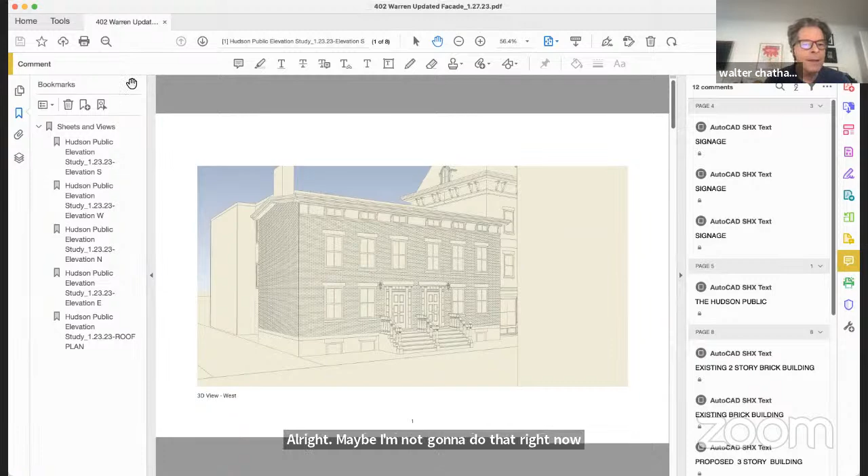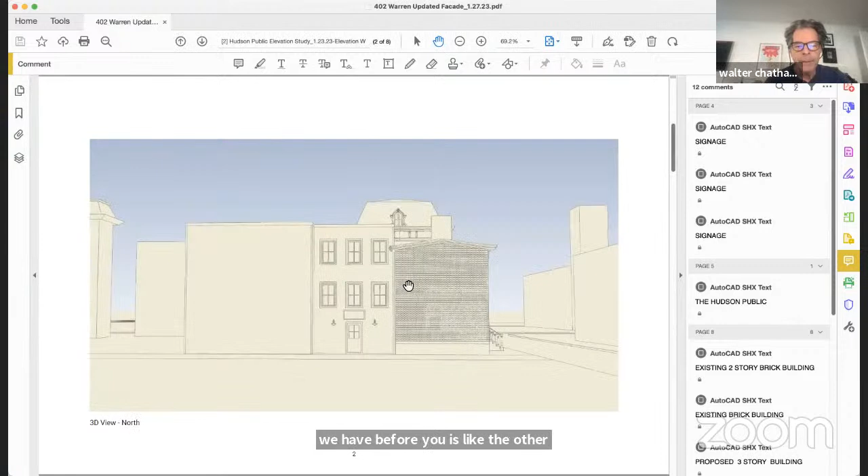So I think the thrust of the conversation last time seemed like everybody was pretty okay with everything, at least on the commission, except for the row house. So we had some serious discussions internally and decided, you know what, for 2 hotel rooms, it's just not worth the bother. So the new proposal we have before you is like the other proposal, but it has eliminated the additional rooms we were proposing on top of this structure here.

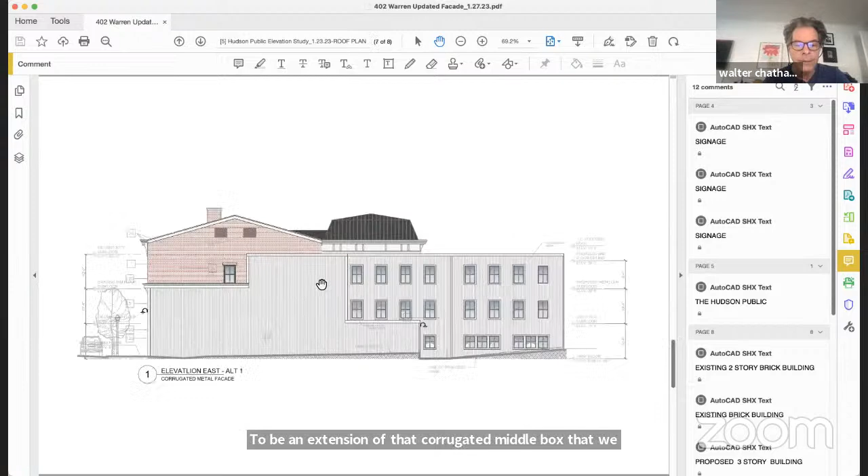We've simplified the proposed structure that we would have there to be an extension of that corrugated metal box we were proposing behind Warren Street. So we basically run this along the property line, the east property line. And as I say, we're going to try and do the project without changing the roof line of the small row house. Now, this illustration doesn't show what we probably have - a roof cricket back there somewhere and some gutters. Chip can explain all that better than I could, but basically the idea is, okay, nobody liked it, or there were a lot of issues, so we're taking it away.

What do you think now? And with that, I guess we can open it up to a general discussion. I think that's great, but the purpose of the public hearing is to connect the public to the entire project - maybe you want to do that very, very quickly, Walter. Oh, I'm so sorry, I guess it's a public hearing, it's not just for us. No, I understand, I guess it was a continuation, so I was assuming incorrectly.

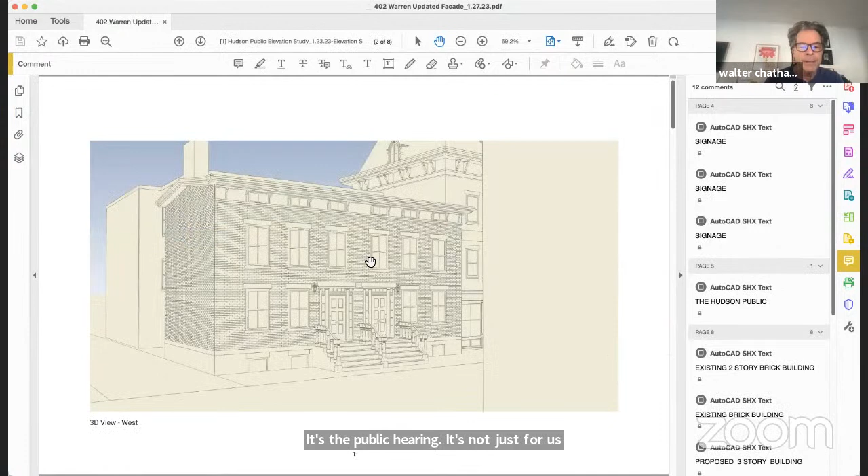So this proposal - let's go back to the elevations - is to take the existing buildings that stretch down 4th Street, starting at Warren, down to Prison Alley, and to take this vacant lot here, at the moment vacant, and build a hotel on the combined properties. We would keep the historic buildings pretty much as they are and infill a building here, which would be the entrance to the hotel and therefore would have a high roof because we have elevators in there that need an overrun. So for this, we're proposing a mansard and a setback building here.

And then at this point, we're proposing restoring this little row house building here and also this 3-story building here, which was at one time a hotel and possibly also offices. As I say, the brick bits are the historic buildings. This is our infill proposal, as is this thing you're seeing behind the building, down the alley about 20 feet. So it would not be visible in any way, shape, or form from the street, except if you looked up the alley and happened to see the side of the building.

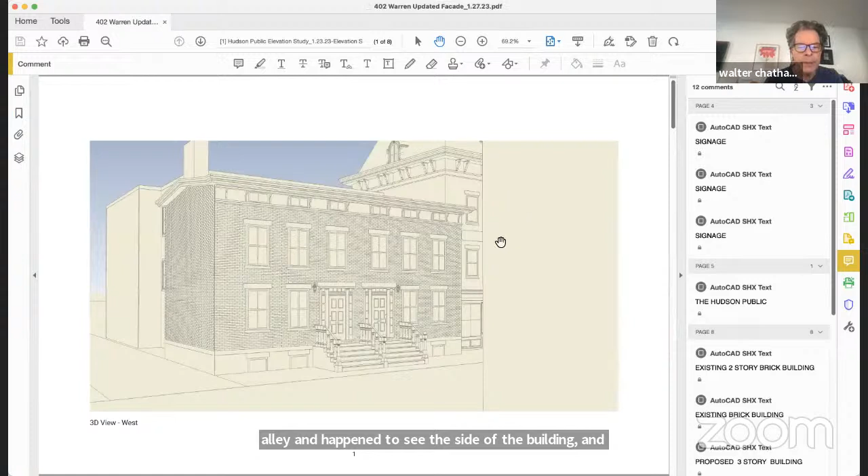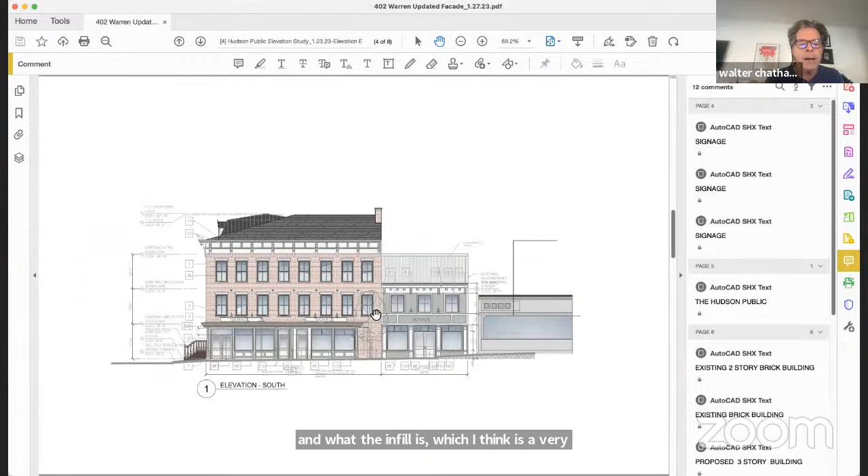And we produced a series of perspectives just to kind of show the effect. This is the new building we're proposing here that I mentioned with the elevators. This is the corrugated metal clad part back here, frankly utilitarian, and I think would very clearly set off what the historic material is and what the infill is, which I think is a very important point. We're not - this is clearly infill in my mind. We're treating it historically just because it's part of the historic street front. So I hope that has brought us current and everybody now understands where we're at in the discussion.

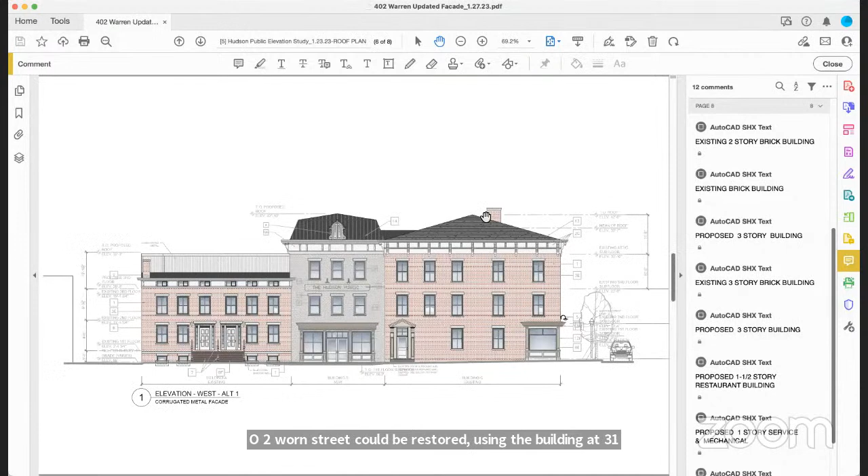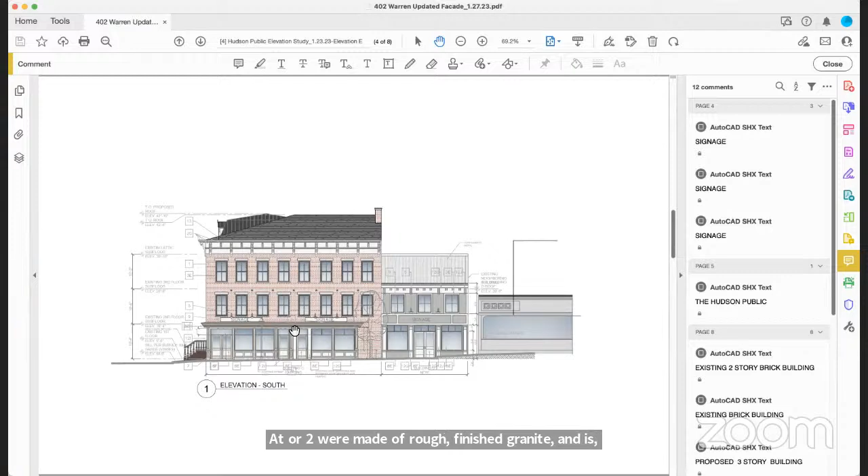The pillars and the remaining fragments around the existing doorway at 402 were made of rough finished granite, dressed with a stone finish to match marble. The square molding at the top of the lintel may be marble.

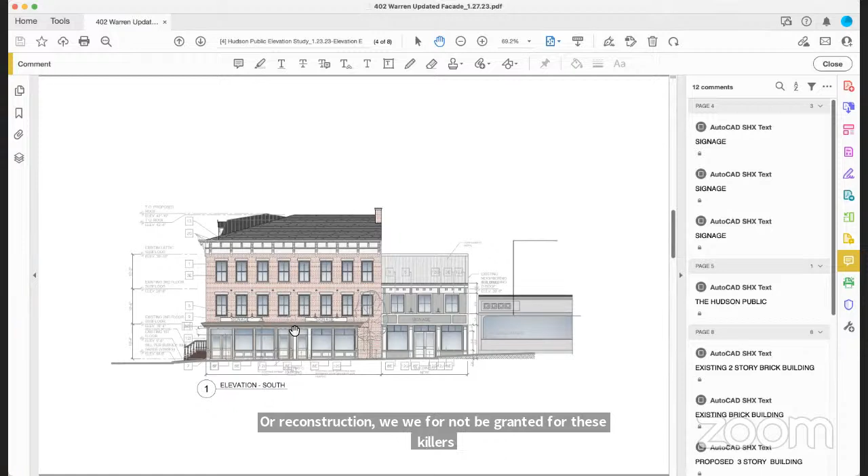For reconstruction, the core need not be granite for these pillars. They could be cased I-beams given a marble finish and would do just as well as putting back the actual granite, which is then covered with the finish of marble, probably using marble dust and some kind of sand and originally linseed oil.

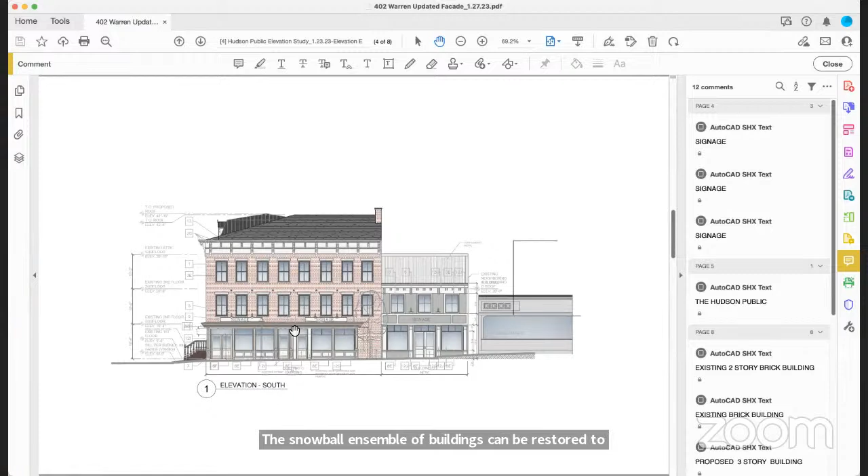The I-beams that are now forming the lintels of the building could remain in place and given a marble finish as well, and this noble ensemble of buildings could be restored to their former glory. I just think that this is a valuable asset and it can be made to really reflect the scale and the look of life here at the time they were built.

I think the city of Hudson is remarkable in that respect because there's so much of it that is still the scale and finish and look of another time. And I think we need our history. I think we have a prime example of this in our political situation. Our Constitution is being ignored. Our past is being ignored. And I think we should hold on to it. I think it helps us to understand our lives and go forward. Thank you.

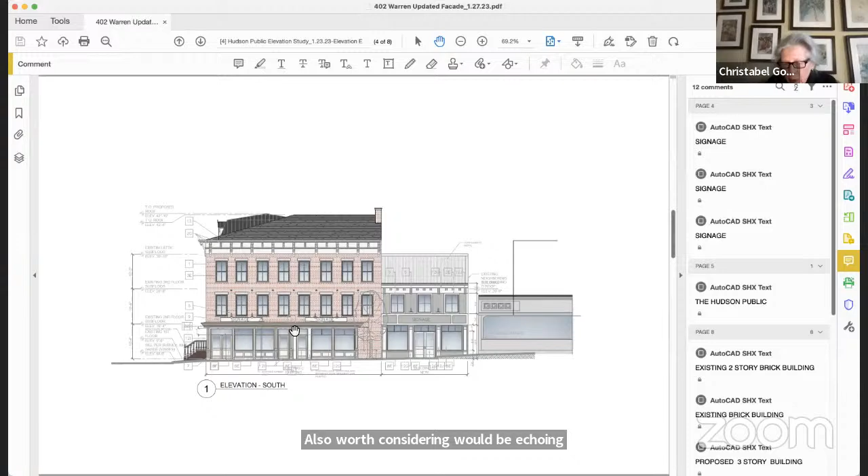Also worth considering would be echoing the 4-bay fenestration on the building that was lost, with additional windows above the hotel entrance, which might help mitigate the new height. Certainly, I hope that the new hotel can become an asset to Hudson that fits in with the real historic architecture that we are fortunate to have here, while maintaining its own distinctive presence. Thank you.

Yes, but also Chip wanted to see a plan. If it's okay, I'm going to put up an elevation right now and tell you what's happening behind it. Is that up and can you see my screen?

This is the actual alley elevation. That's the blank end of the current row house under discussion. Then there's an inset, which is a secondary entrance and egress for the hotel. Then there's another blank wall because there are hotel rooms behind that. Then here, you go down a little walkway and that's a little tail that takes you into the service area.

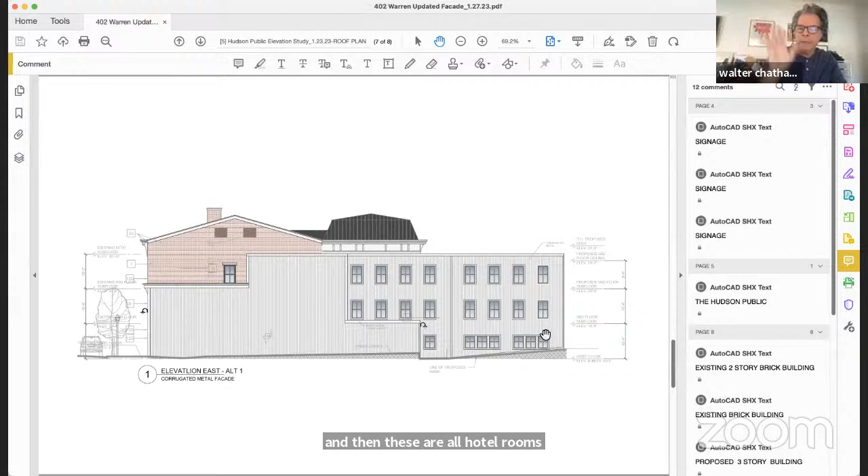And then from the side, there's the tail again, the service tail. So there's a little gap between this building and the adjacent property. And then these are all hotel rooms facing onto, not directly onto the alley, but looking east, perpendicular to the alley. And then I'll just show you, there's the alley, there's that elevation I just showed you. So that's the little one-story tail.

So Chip, to answer your question, on the ground floor this is all the kitchen and service. And down here, these are all hotel rooms. The little finger sticking out there, is that just a one-story finger? It's a one-story finger that contains our trash room, right there. So the trash room access is through those double doors out to the alley, yes.

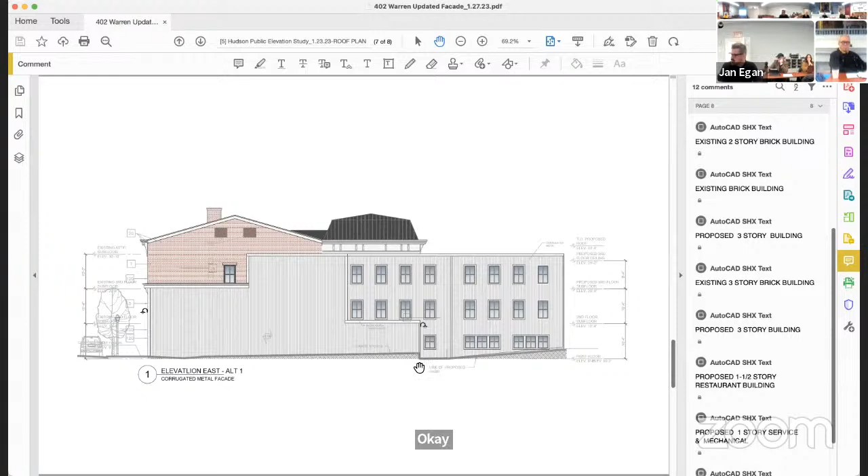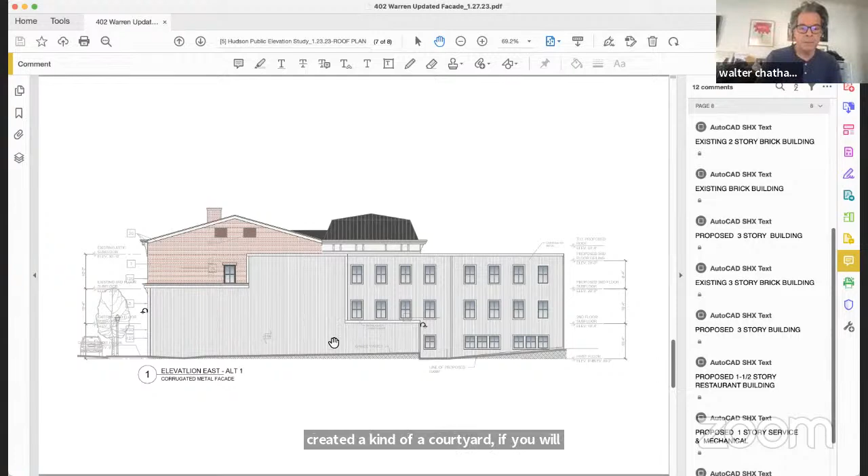And that's one story high. Are there windows—you've created a kind of a courtyard, if you will? Yes, yes. Three-dimensionally, it's hard to read because we only have the elevations and this site plan roof—it's really just a roof plan.

So the two and three stories parallel to Warren Street, that's above the trash bin or the trash room. That trash room is roofed. It's a room, yes—it has a roof, yes.

So are there hotel rooms parallel to Warren Street that overlook that? There are hotel rooms here that look back over it. So those two windows—correct, those are hotel rooms? Correct. Okay, keep this elevation up, please.

Then the infill building to the left of the historic townhouses has two floors—are those hotel rooms? Sorry, do you mean are we on Warren Street now? No, on the alley. There's three stories here, all three stories that we're adding. I'm sorry, the second and third floor, those two stories—are those hotel rooms? No, those are corridor and the stair. Interior circulation. Okay, so there are no hotel rooms there.

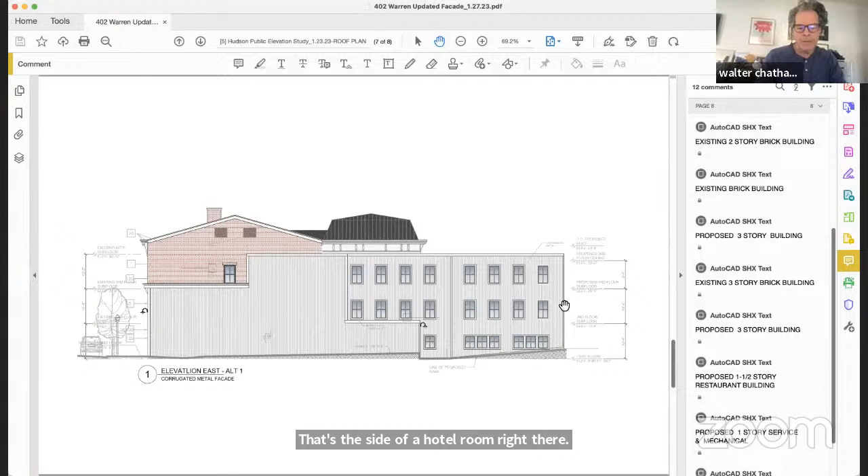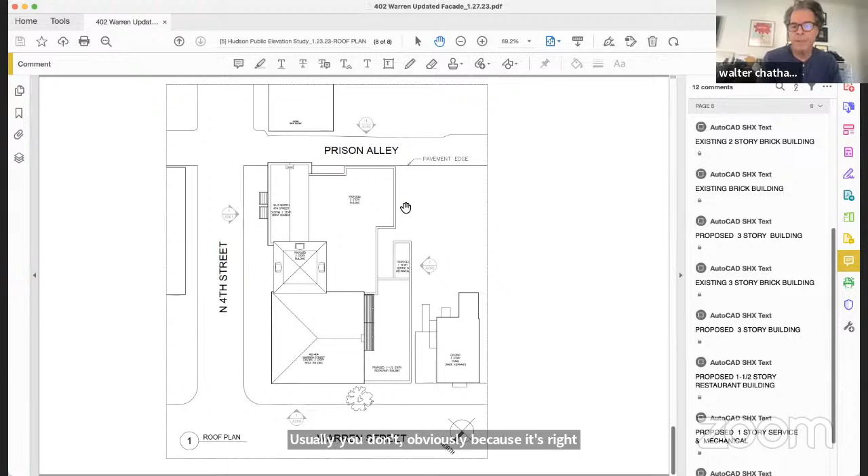Would that hotel room on the corner of the alley and the interior east wall benefit from having windows looking at the alley? Well, let me turn that around—would that benefit our discussion with HPC if we had windows on the alley? Because I have no objection. Usually you don't, obviously, because it's right there, and if the guy comes with the trash truck at 4 a.m., but I guess we'll hear him out the front window anyway, so sure. I mean, we could dress it up.

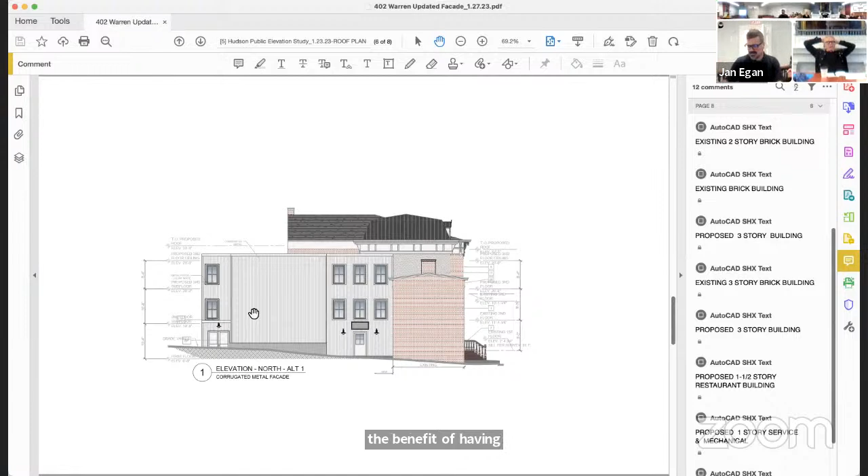It's interesting, apropos the discussion we just had—so that could be dressed up, and this can be dressed down. I think that's what I'm saying, so we can kind of do a blended average over the whole thing. The benefit—also issues of privacy—the benefit of having additional windows on the alley is to show, in an urban setting, that there's a kind of supervision overlook activity there that promotes a healthy alley.

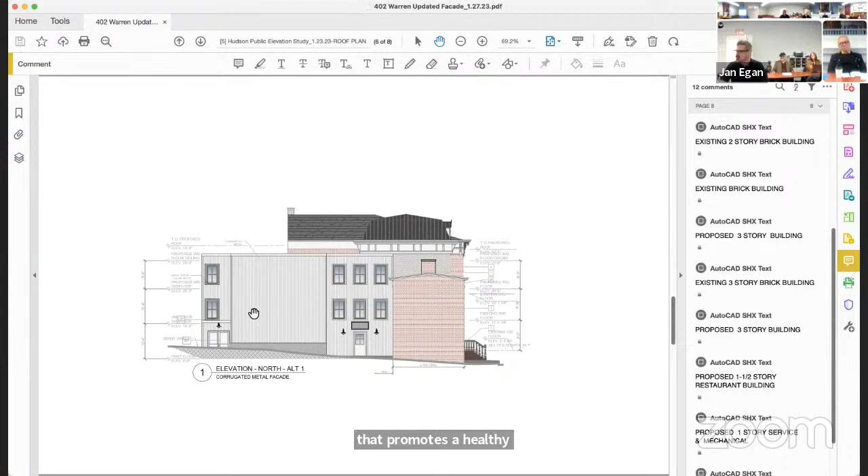I think there is something for the commission to understand in terms of the sight lines from 4th Street, looking over the historic buildings, the two townhouses, and seeing the roof line exactly as in this drawing, which of course is flat and shows a greater impact than in reality.

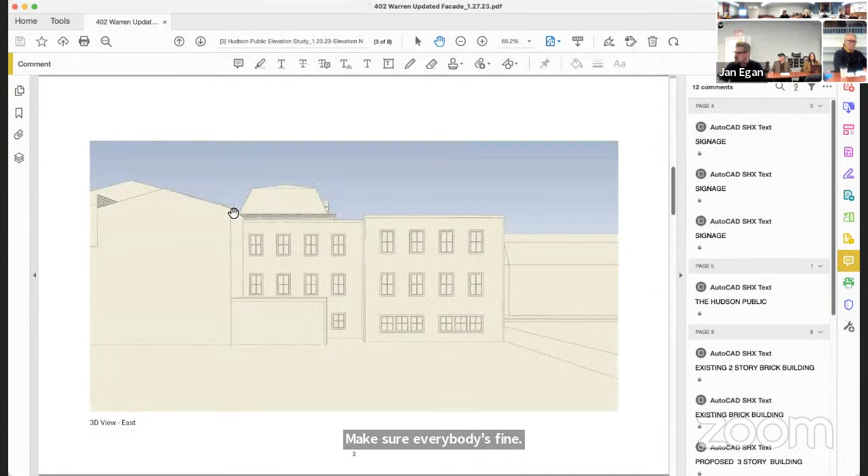I think it would be very helpful to understand what the impact is. That's taken from an elevated view across the street to double emphasize that this would not be visible from 4th Street. Got it, that's super helpful, thank you.

And there's your blank wall, Chip. Now, that blank wall, some people have spoken eloquently about blank walls in front of this and other projects. So there are two blank walls in the dialogue.

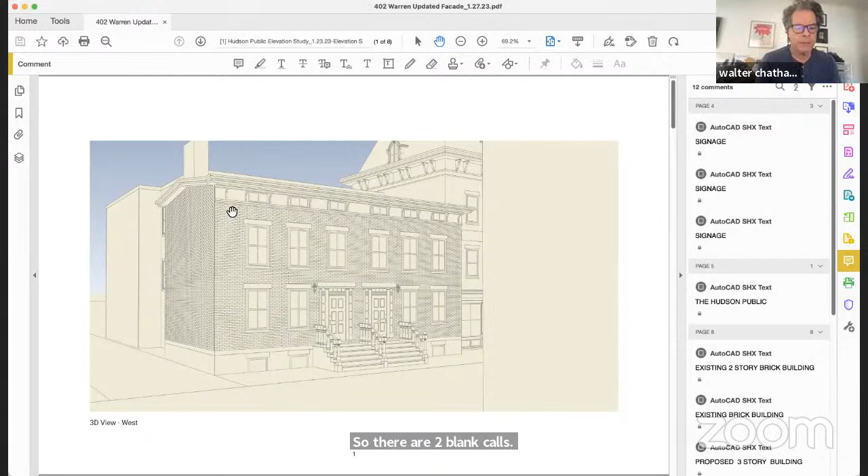I recall hearing that A.J. Davis was a huge fan of blank walls, which is why, Walter, you were not able to illuminate one of the rooms in your house. We're getting a little feedback from the owl. Thank you.

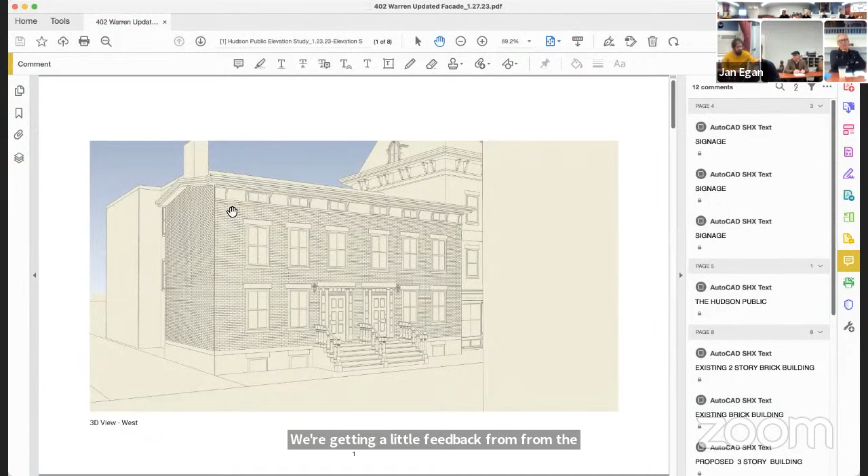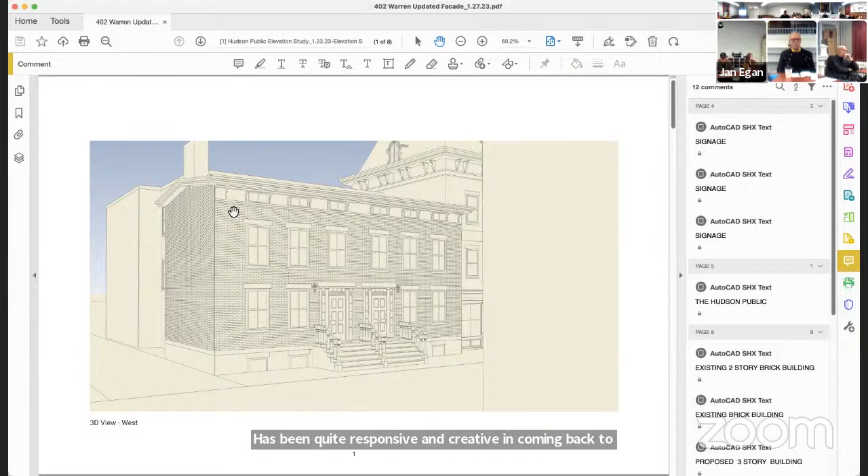Anyway, I'd like, if at all possible, to narrow the ask, because we've gone through this a couple times, and in every instance the applicant has been quite responsive and creative in coming back to us. And I understand where Chip is going with the alley. I'm a Prison Alley person, or was, prior to the departure of my beloved dog, Bob.

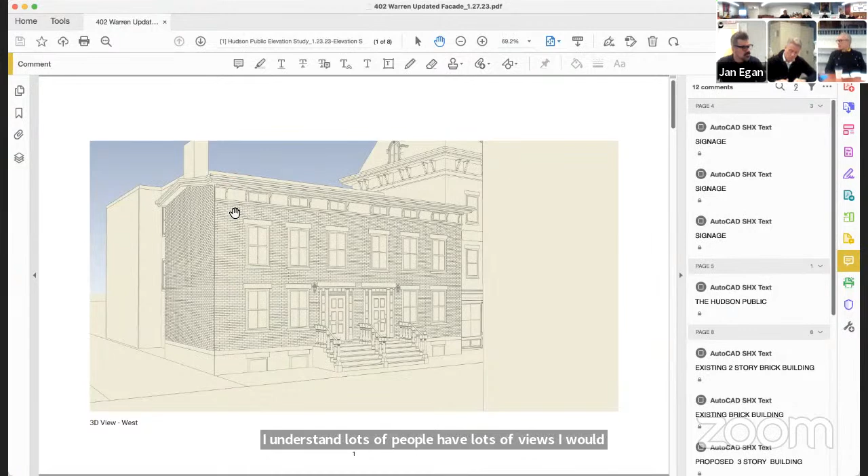Can we focus just on what is our ask? I understand lots of people have lots of views as a commission. I would suggest that what we're asking for is a whole comprehensive presentation that addresses all of these things.

We're in a very preliminary state here. Although we have drawings of the exterior, we don't have the details of the storefront. We don't have the details for the legitimate restoration of the two townhouses, their stoops and their windows and their detailing. And we don't have any architectural details of the proposed infill, the quote unquote sheet metal infill, which I think needs to be articulated for us to review.

Just saying that it's a sheet metal box is not enough to understand the impact that it will have on the adjacent property and on the alley.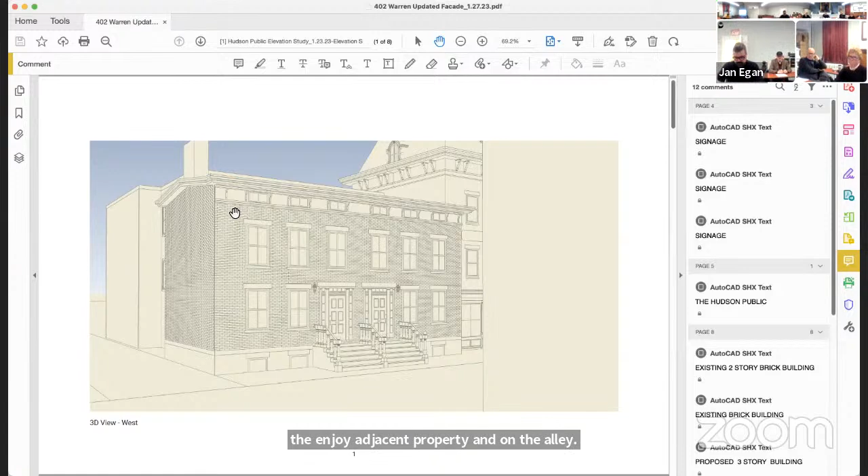So I think that the applicant has made fantastic progress and has an incredible project here. And we want to support it 100%, no doubt. I think that what we're looking for is sort of the next level of design refinement, architectural detailing to be brought to the commission for us to review.

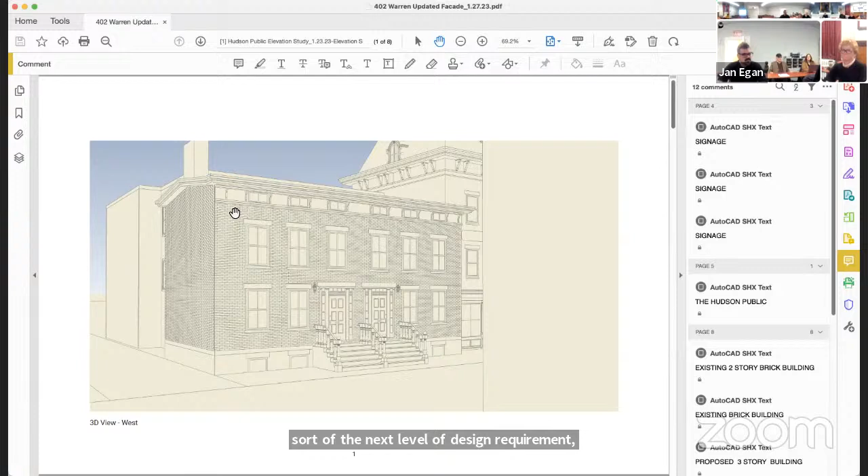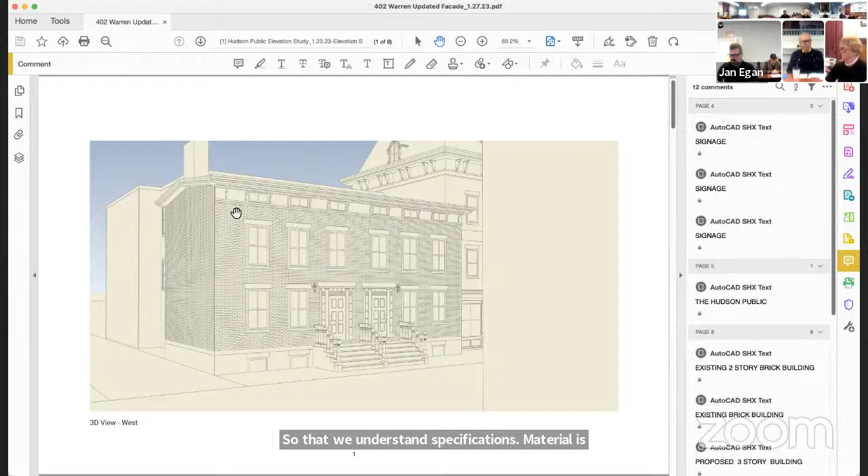Clearly the request for detail so that we understand specifications, materials, shapes is straightforward. There's no question about that. What I want to be able to be extremely clear about is, in addition to all that—

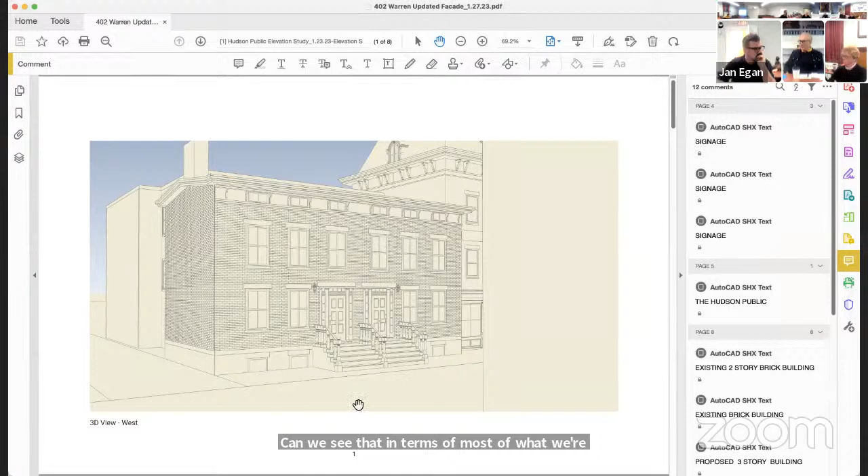which is just a level of professionalism and dialogue with the commission, can we say that in terms of most of what we're looking at, or all of what we're looking at, that we're either there or close to there, depending on what we learn from detail, and that the subject we're bringing back to the applicant to ponder is the so-called grand mansard roof? Is that a fair assessment, or are we going back to zero?

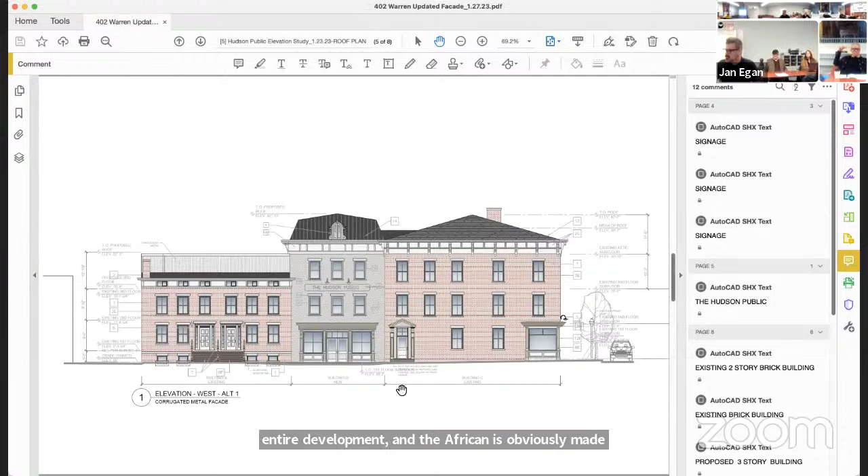We're not going back to zero. I think that the commission has been very clear about looking very favorably on the concept of this entire development. And the applicant has obviously made great progress with today's public hearing, and I agree too. I feel nothing but good about it.

And I think what we're asking for is, okay, we've got a concept here. Let's have the applicant take it to the next level of design refinement, and then let's review it. I do think, in addition to that, we're asking for some more thought about the mansard.

Yes, we're looking for alternative ways of dealing with those mechanicals. We're not saying you can't have it there. Well, I think it brings up another question, which is, where are the mechanicals?

Right, we don't see that in the roof plan. We don't see that in the floor plan. We just had a discussion about where the trash location was. I don't think the commission's ever had a discussion about the location of the trash, and it's important—important for the design, and also important for the livability of the project.

So where are the mechanicals that are going to be required for every hotel that has massive air conditioning requirements? Where do they sit on the site? You had a tiny little rooftop hidden behind the mansard, but now that you've given us all this flat roof, we can put them anywhere on the addition. They'll fit behind a parapet screen.

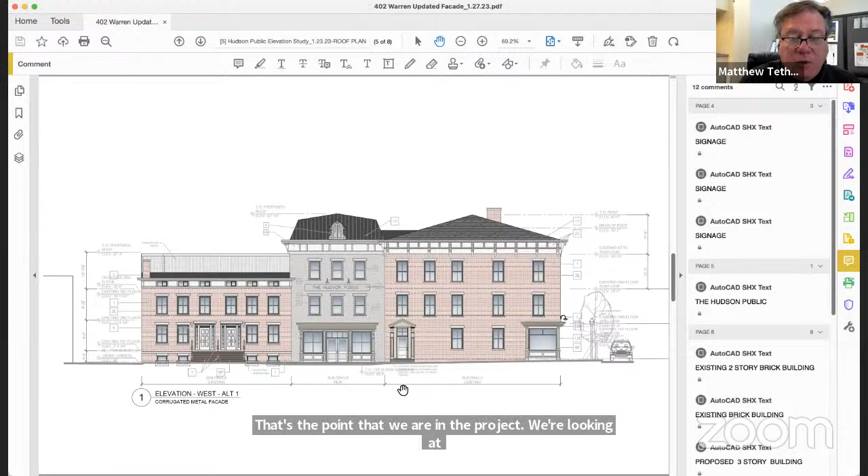In terms of mechanical, that's the point we are at in the project. We're looking at some type of heat pump system that would have some units, but they would be screened because of their location in the massing of the building, and they would be rooftop, but you would not see them. Okay, thank you.

I just want to say, Matthew, you said it earlier, which really resonated with me, which is, now that you have the extra space in the back, you and Walter both said it, can you de-formalize or de-emphasize the mansard? Can you make that less so, and in doing so, even if it means doing more behind it, I think you'll achieve what you want.

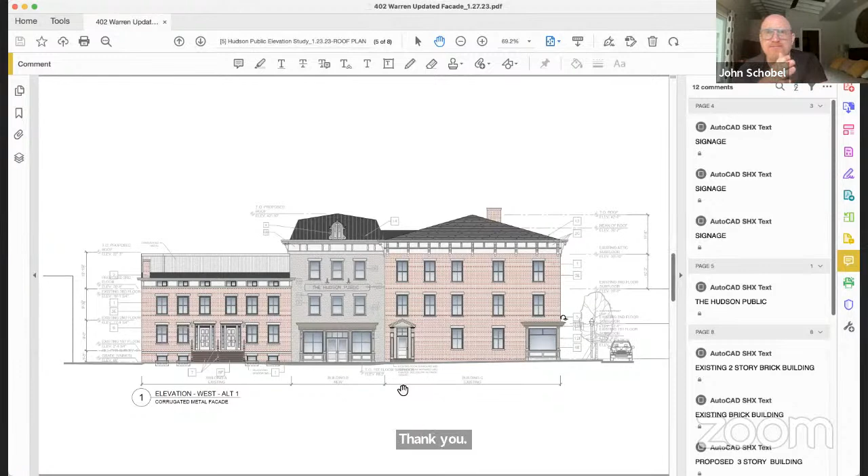The other thing is, thank you John, that's what I'm hearing. I didn't bring it up, but I agree with Chip's point. We just never got to it before, but I'd had concerns about it when it was 2 gambrel roofs. Just those flat new elements in the back in the alley. I tend to agree with Chip, right?

Like, I don't know if you want windows in your garbage room - that's not what I'm saying. And I don't want them to be Disney-esque faux windows either, but understand that the row house is original, and that new element is a lot of blank space for our alley to absorb. So if you could consider that, I think it would benefit.

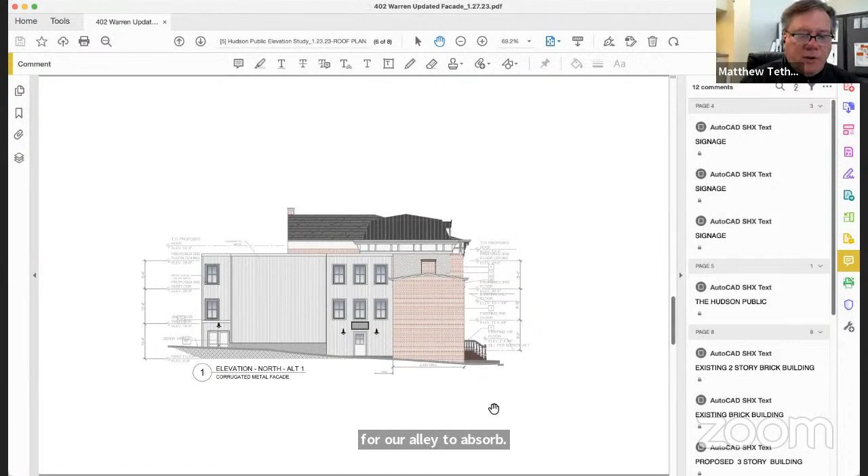Sure, yeah, maybe I'm oversharing here, but if we look at that blank square, the left-hand side, that's where the guest rooms are. We can probably accommodate something there, maybe not at the first floor because of the grade, but on the left-hand side we can definitely do something. The right-hand side is really where the entrance and the bathrooms are. Maybe not there, but can we do something?

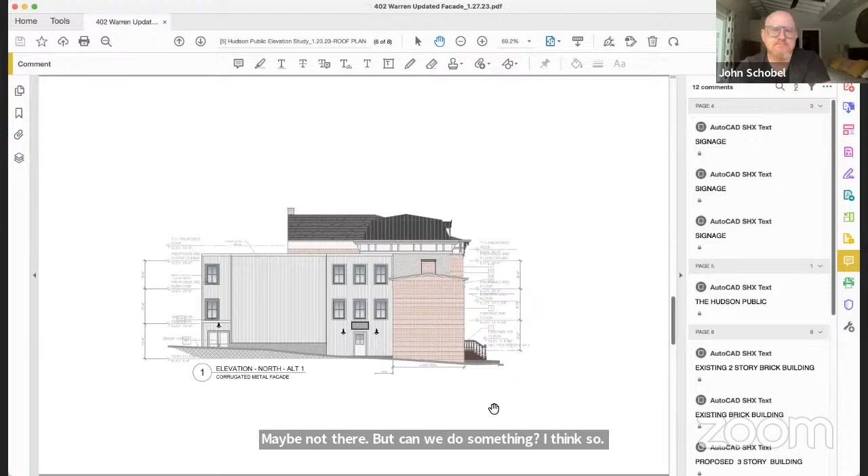I think so. Cool. I just want to say quickly though, in Old Hudson there would have been a blank wall and it would have had a sign hand painted on it. We'll look at a number of different options. I got the 'eyes on the alley' concept, but honestly, they're going to have security cameras and a guy sitting there, so nobody in the hotel room is ever going to have their curtains open on the alley.

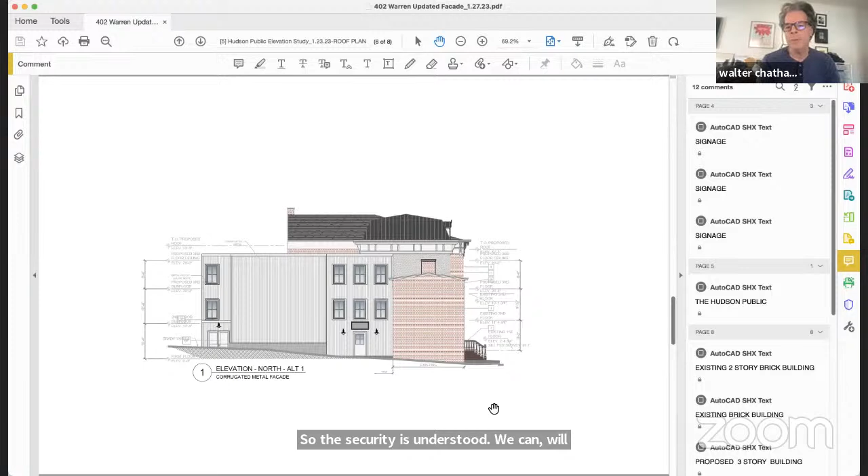So they're not going to be, you know, so the security is understood. We'll find an architectural treatment that's appropriate that doesn't disturb the guests. And for the mansard, as long as we can get our elevator rides, we'll find either a form or a cladding treatment that is acceptable to the board, and we will just do that until we have to do something else.

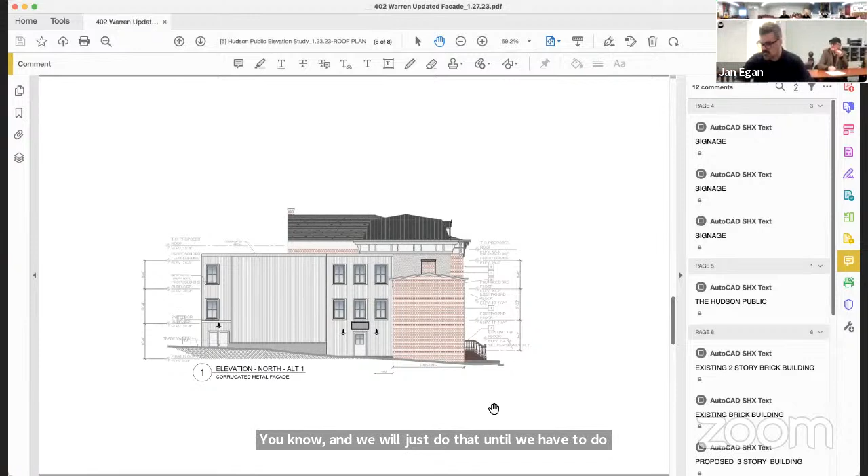So, in this drawing, it appears as though maybe you're considering a brick water table on what is now the blank wall. If that is considered to be brick, I think that's a very good way — the top of that brick wall finish might even want to be raised some in this composition. I think brick would be a successful material there to begin to break up the other elements you have there. I think the recess is hard to read.

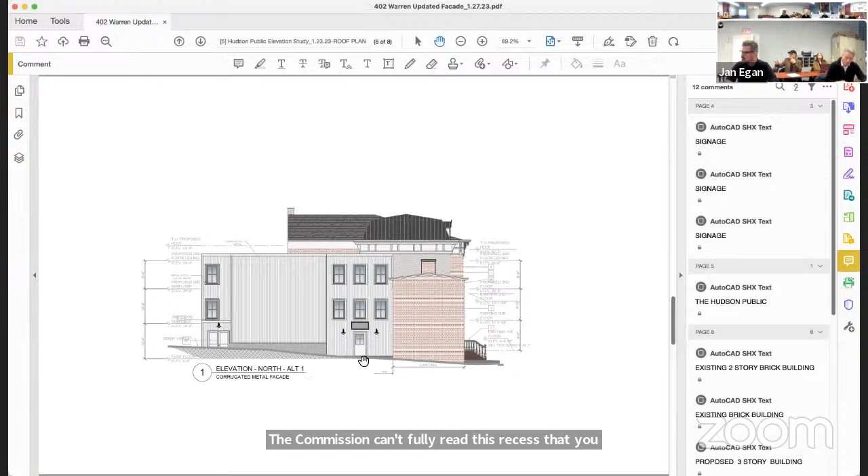The commission can't fully read this recess that you have for the door and the three windows there. I think that recess is important and is successful in thinking about breaking that massing up and making it a composition of smaller parts on the alley.

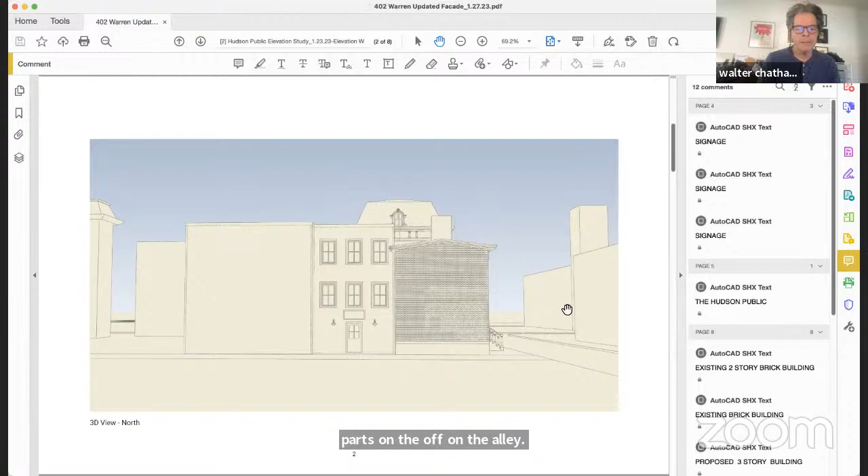Right. Okay. I like the brick idea a lot. We're going to work with that too. I think that's a nice idea. Okay, is there anything that you guys feel we are not being clear about, or you feel we're unclear on?

I do have one other question, if I may. The door that is there on the alley side, is that a door of high frequency use? Or is that an exit only door? It would be an exit only door.

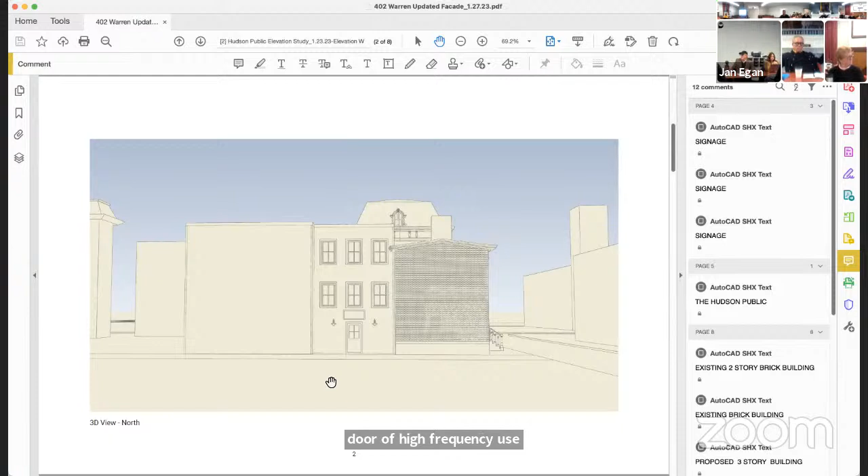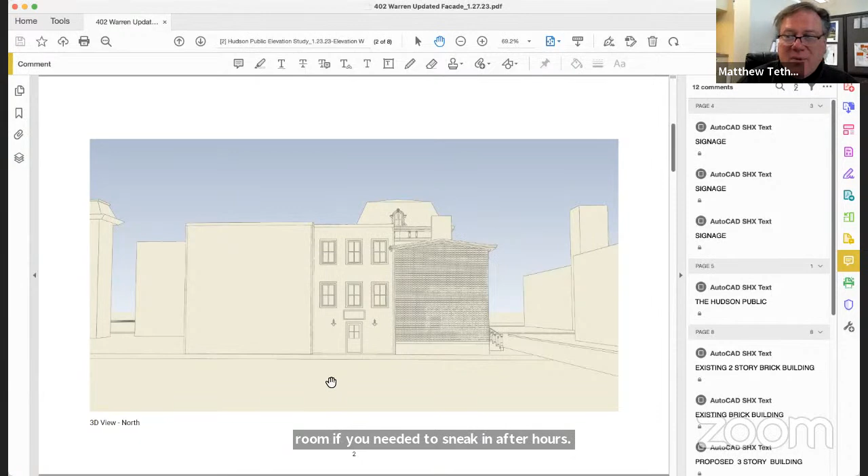Yeah, Matthew, do you want to go ahead? Yeah, that's an exit only door. Okay, I mean, a guest could go in there. It would have a key reader and you could get to your room if you needed to sneak in after hours or something. Yeah, I mean, I guess I don't know how the guest ended up there, but could it happen? I guess, yeah.

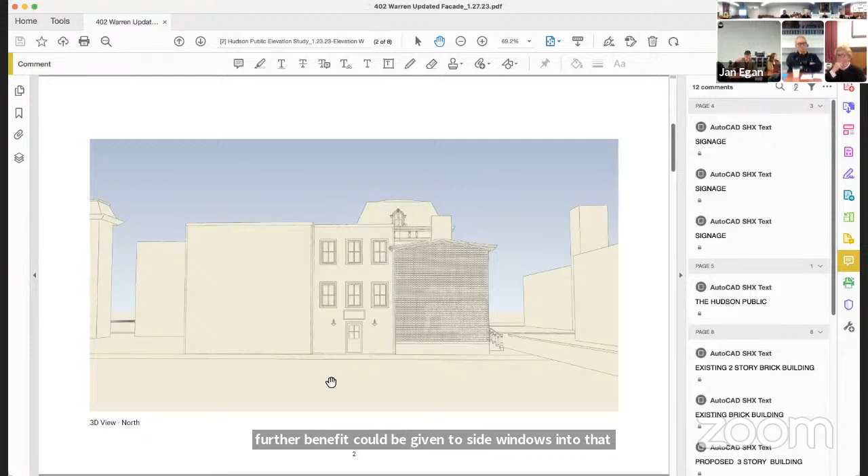The reason I'm asking is, it's not intended to be high use. Okay, well, the reason I'm asking is that, for instance, if it were to be high use, further benefit could be given to side windows into that space — again, more transparency, more life, and not just a door on the wall. I see you've done it with what appears to be a sign. I don't know if that's a sign or an awning above the door. Fine. But these kinds of architectural elements give life to that building and give life to the alley.

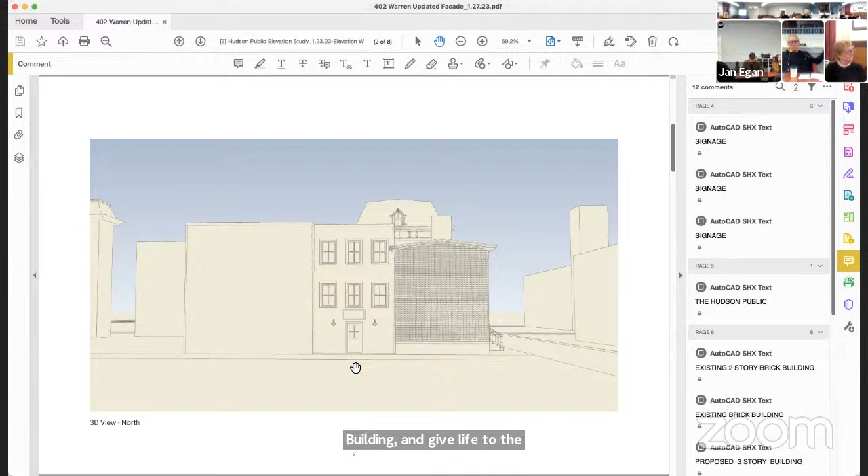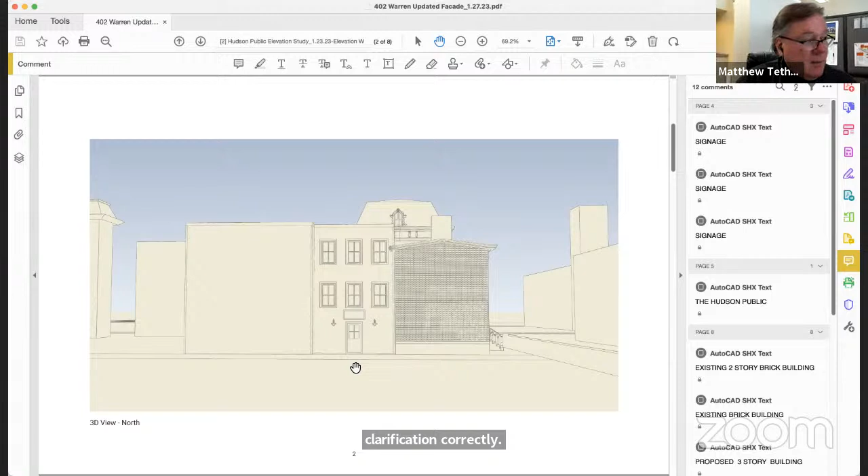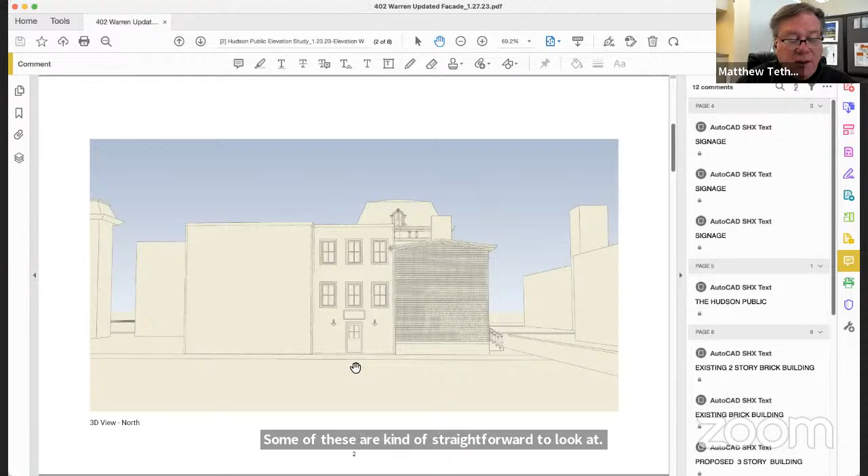Okay, we're pausing. I'll ask the same question. Are you guys clear going forward, or do you need further clarification from us? Matthew, would you like to answer that? I'm pretty — I think it's clear, and part of me feels a little disappointed, but at the same time, I think that some of the comments here I have to admit I agree with, and it's the process, and we will take a look at it. We'll give some thought — some of these are kind of straightforward to look at. We'll have to give the mansard some thought, but is it clear? Yes, it is clear.

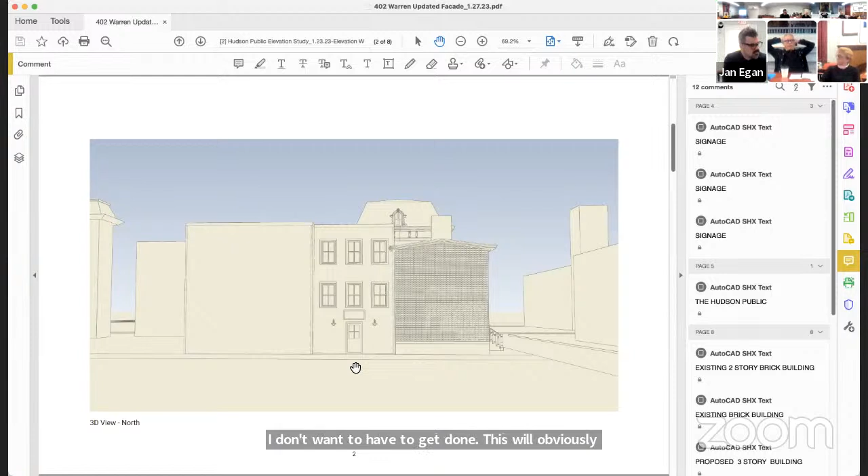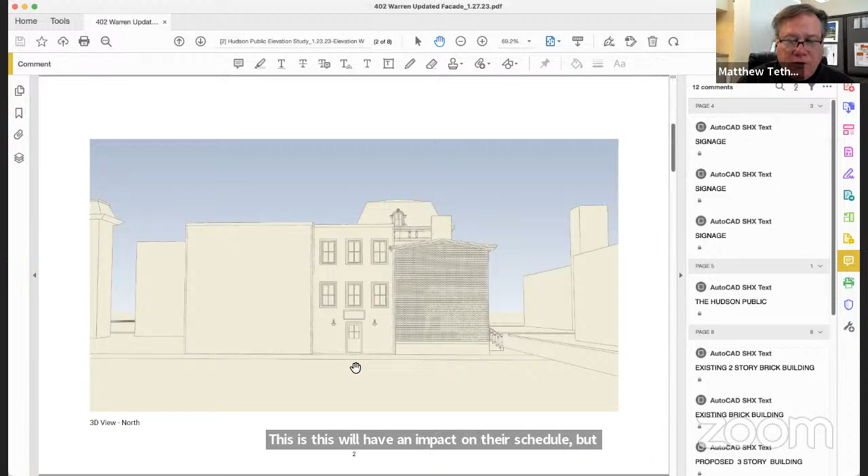Okay, then that's great. That's all I was hoping for, that we stay very direct with one another on what has to get done, because obviously a lot of great work has already been done, and you guys have been super responsive. So I have to manage the message going back to my client, who really wants progress and wants the project to go forward. This will have an impact on their schedule, but at the same time, we need to make the right long-term decisions. I think Chip's point is obviously correct.

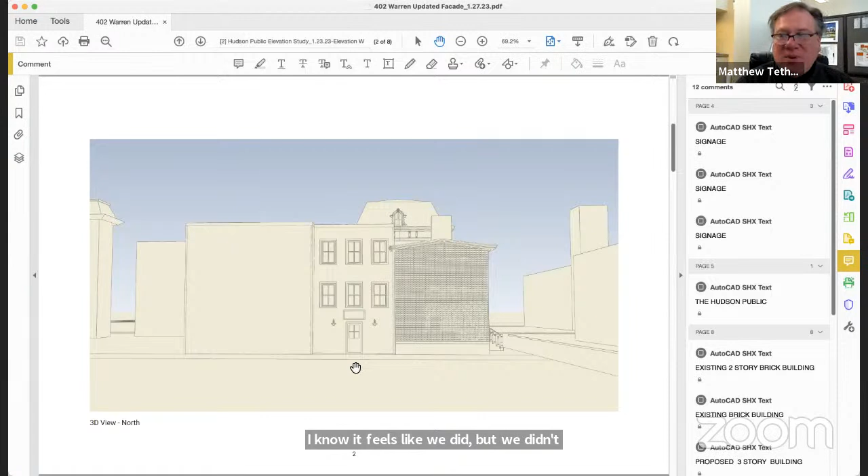There is a level of detail on some of this stuff that we really never got to. I know it feels like we did, but we didn't. I could not agree with you more on that, but I think we want to get the concept approved and then move forward to develop those things. If we had exhaustively detailed the addition on top of the row house, the townhouse, and that went away — I think we have good direction here, and we want to do it. That's what we do here. We want to move forward with that. All right, thank you for that, and thank you for understanding. So I just want to make one thing clear on this.

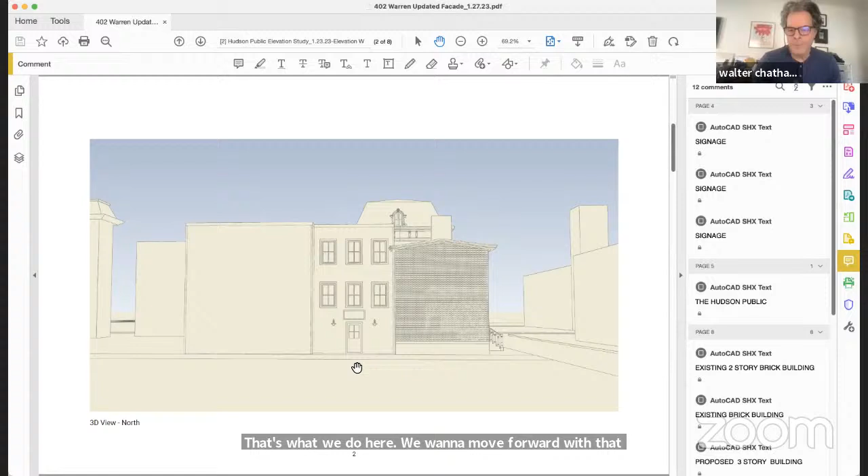So I'm understanding this: a number of points were raised by the commission, and a number of points were raised by the public.

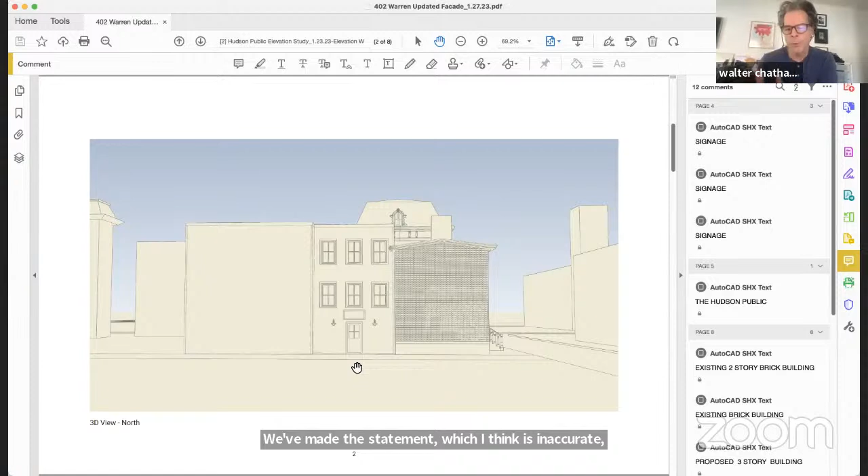One point raised by the public was about the granite piers on Warren Street. We've made the statement, which I think is accurate and fair, that we will record and preserve any extant granite piers. We do not currently have plans, nor would we wish to have plans, to restore those piers. I just want to make sure the commission agrees with that so we don't spend more time not addressing something.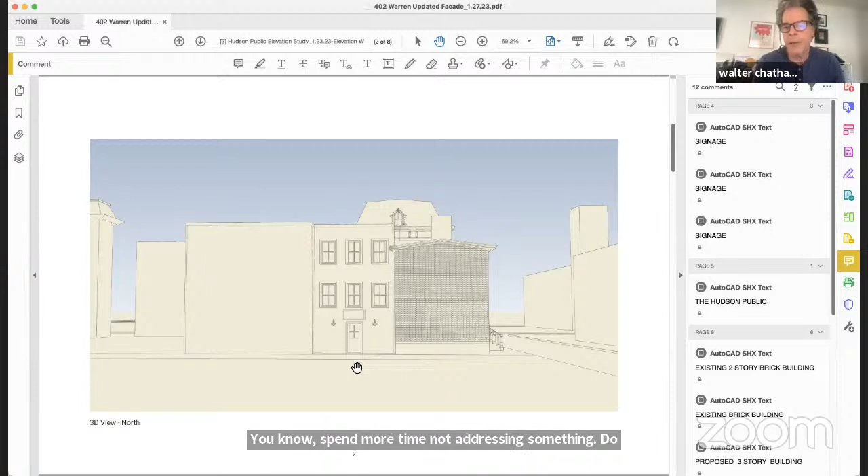Do we need to look at the Warren Street facade, or can we detail what we're proposing, and will that be acceptable, do you think? In the normal course of business, you would point out original historic materials significant in your plan and indicate best efforts to retain and restore those elements. It's just kind of standard business.

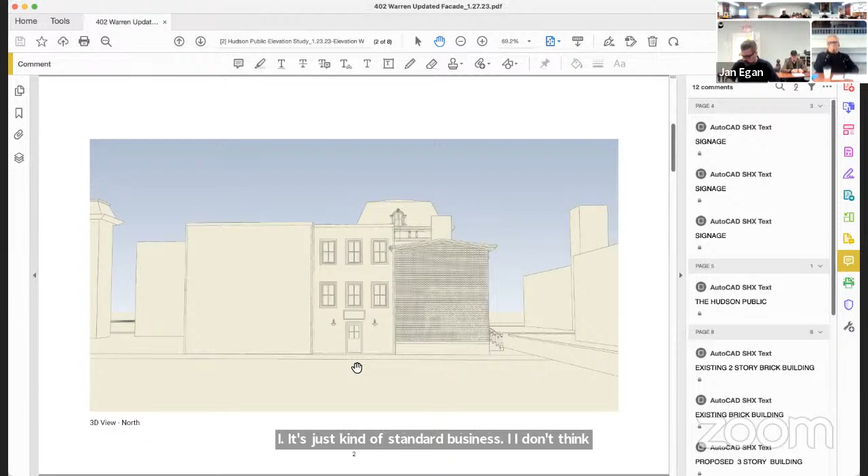I don't think the commission's been informed about what the concept approach is for this storefront, so we haven't had any discussion about that. I think we did in one meeting, but okay. I think the big picture concept of having storefronts on Warren Street is perfectly appropriate. The question is, how does that get done?

That's something that's up to the applicant to present us with how one intends to pursue that. And Walter, I don't think you explained to us where those piers are and how you're intending to deal with it in any kind of detailed way.

Then may we spend 2 more minutes? I don't want to take anybody's time, because I'd... oh, like to. Please do, it's time well spent. Again, I apologize, Jan. I think when I reacted the way I did, it's because I'm a little confused about how long we've been in this particular process.

I do have a very strong recollection that we discussed these 2 piers on the south elevation here, because they are the only 2 piers I know of that are extant and visible, and they have some nice signage. We intend to preserve those along with the element above, and anything else we find, we would restore.

But Chip, to your point, and I'm sorry if this wasn't clear before, we intend to restore these 2 granite piers, where there was probably an early 20th century, maybe late 19th century storefront put in—a more traditional glass storefront like you'd see in an opened up building. We're proposing putting back what we believe would have been close to the original, with an entrance door on the corner.

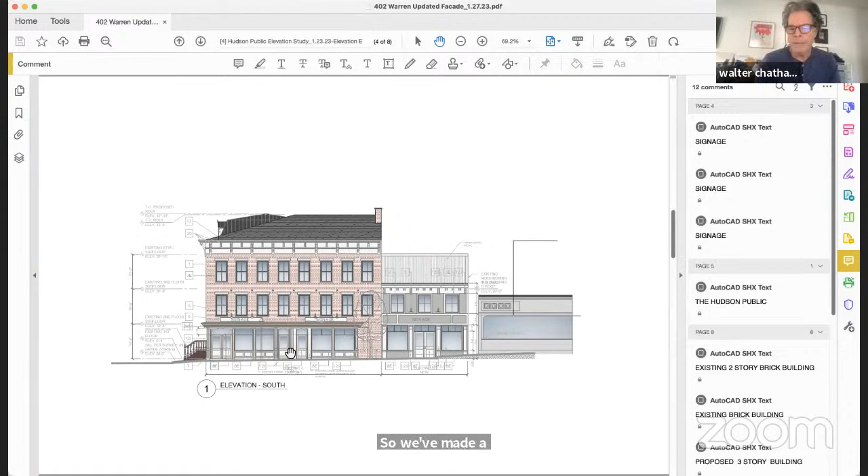This is an existing door, a door that exists in a historical plan. So we've made, and I'm sorry for this word, a kind of portmanteau of existing fabric, what we found in the record that we could hang our hats on, and frankly, the requirements of a commercial storefront. We have details of this, we can bring those in. But to the point somebody made, Matthew, I guess we'd like to make sure all of the elements are essentially approvable and then present the details, if that makes sense.

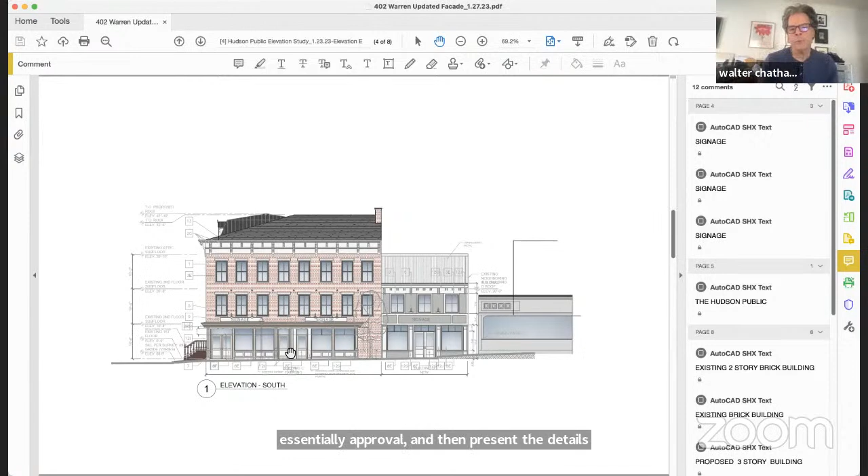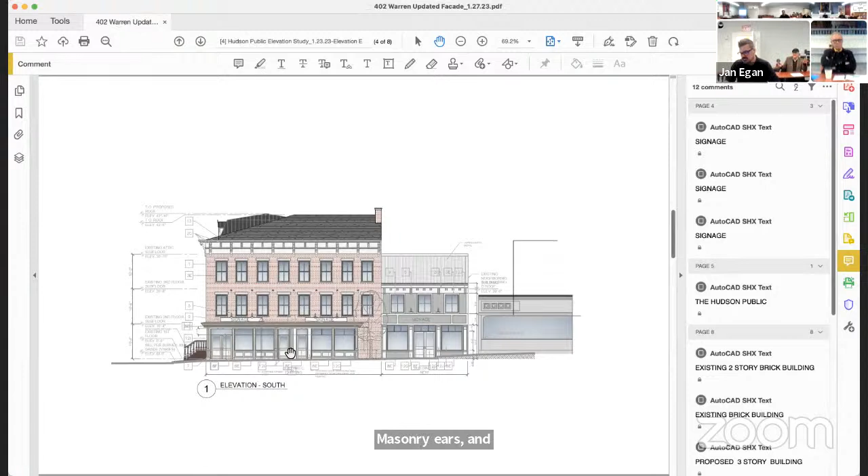Or if you want us to do it the other way, I think we can certainly show you the storefront and so forth. Well, Walter, it seemed to me like you were just asking us a moment ago to approve that you would restore the 2 masonry piers, and that you would do something else otherwise, and that you drew a line in the sand saying you were not going to add any more piers.

I don't think the commission's informed about whether it should agree to you drawing a line in the sand saying there should be no more piers. We don't even know whether there should be any piers or not—we haven't had any discussion about what that storefront is. So you're asking for something without giving us any information.

Again, I apologize. I thought we'd had that discussion, and if we hadn't, let's have that discussion next time. We'll make a thorough presentation of this storefront next time. Wonderful. Great. Well done.

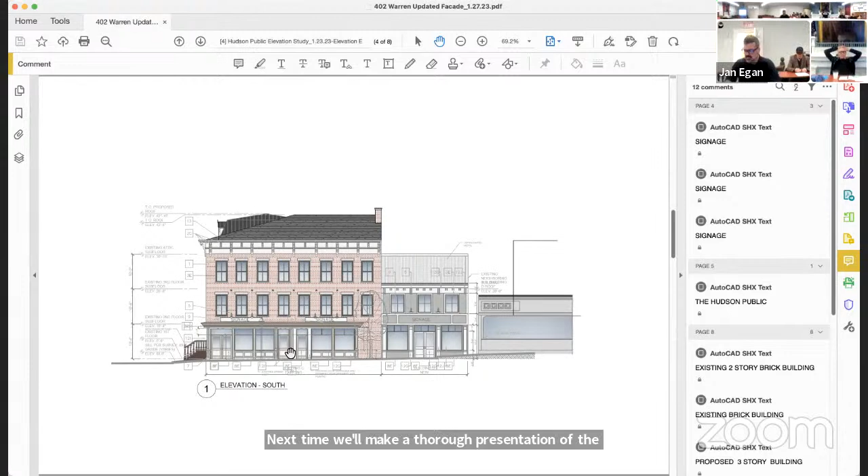Anybody else? Okay, thank you. Thank you all. Thank you.